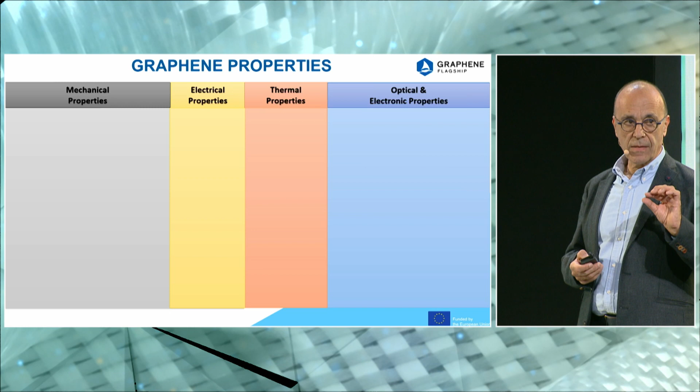Some of you may not be aware of what graphene is. Graphene is a monoatomic material which has a very small thickness, just the size of an atom. It has amazing properties: very high mechanical properties, 1 terapascal, the highest stiffness, strength of around 100 GPa. It can also be stretched up to 20-25%. Very high electrical properties, better than copper, and excellent thermal properties.

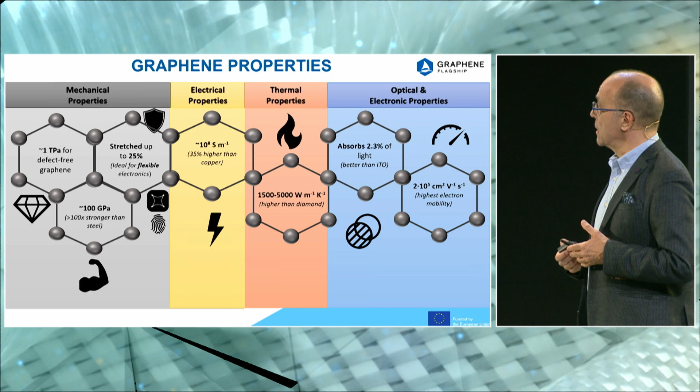So it's like the holy grail of materials. In terms of optical properties, it's almost transparent. It absorbs only 2.3% of light and has very high electron mobility.

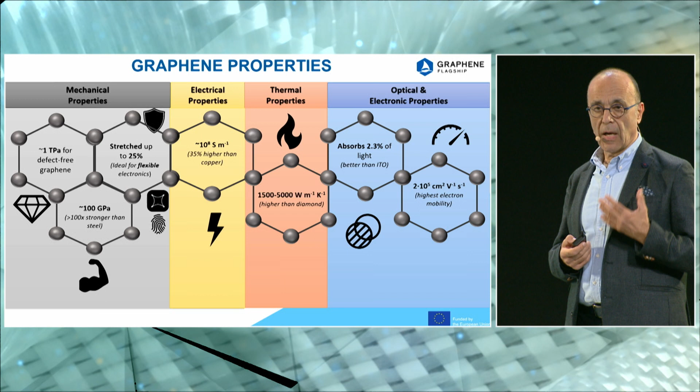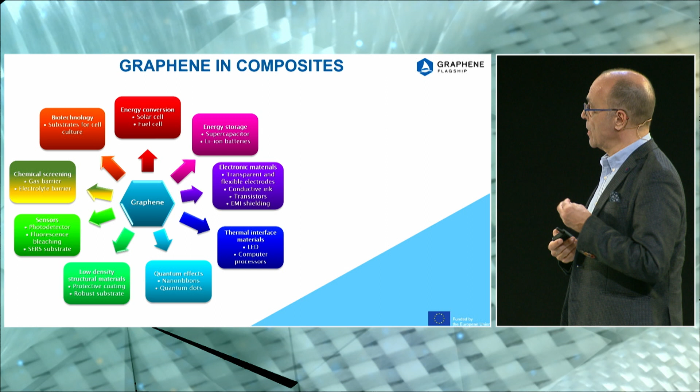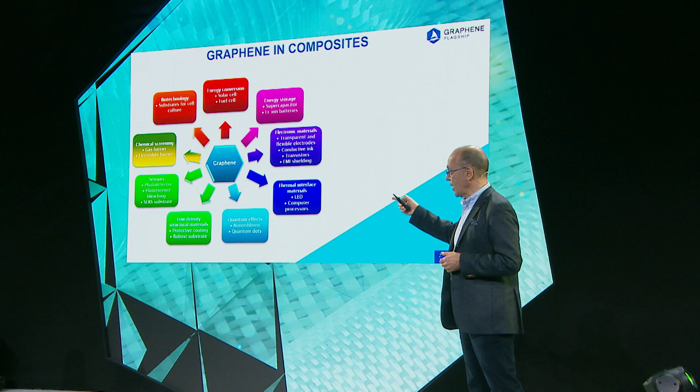Graphene in composites, really, you have to think of all kinds of applications. Down on the left is application on structural materials because of the mechanical properties. But going clockwise from the top, you have applications in energy, composites used in energy applications, composites used as electronic materials, thermal interface materials, quantum effects, nanoribbons. And skipping structure, we can go to sensors, gas barrier, and even biotechnology.

So there are a lot of applications for this raw material, which is graphene, into composites. Then composites, which transport graphene, can be used in so many other applications.

In terms of patents, the blue gives you the patent graph for graphene itself, and below is graphene composites, which has now leveled off, but still we're talking about a peak of 2,000 patents a year, and this, of course, refers to graphene composites.

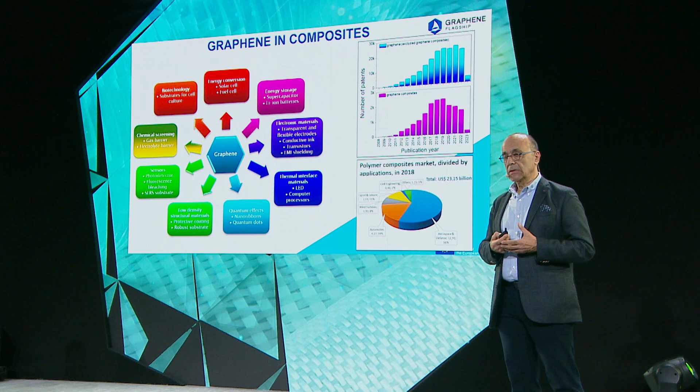Just prior to the pandemic, the most important application areas were aerospace and defense, but also automotive is quite prominent there, wind turbines, etc. Even in civil engineering, it goes into concrete.

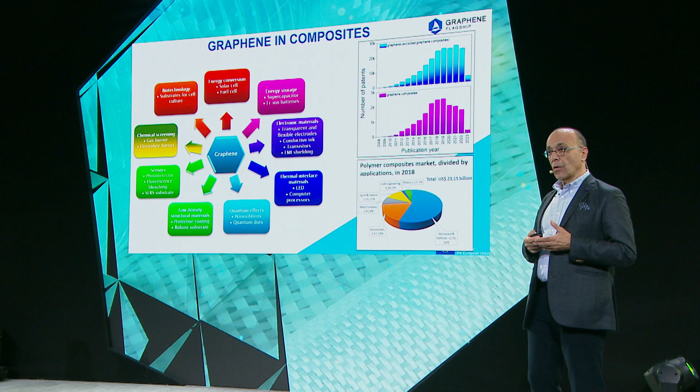Today, we talk about graphene polymer composites in particular. Novel manufacturing processes have been developed. It's a lightweight structure, lightweight materials we're talking about. And multifunctionality is the key word for this material because it combines so many different properties: mechanical, electrical, thermal.

Graphene Flagship is one of the largest networks of funded research in Europe, 170 establishments, and had a duration of 10 years. It's coming to an end this year, with a budget of 1 billion euro.

A lot of things have been developed over the last 10 years. I will just show you some examples. Master batches: you can put graphene into master batches, and you can transport it. Because it's a nanomaterial, you have to transport it in a very safe way. So master batches have been developed, particularly from companies like Avanzare or BeDimensional. The first one is Spanish, the second Italian. These companies actually started at the beginning of the Flagship, but now they are developing into medium-sized SMEs.

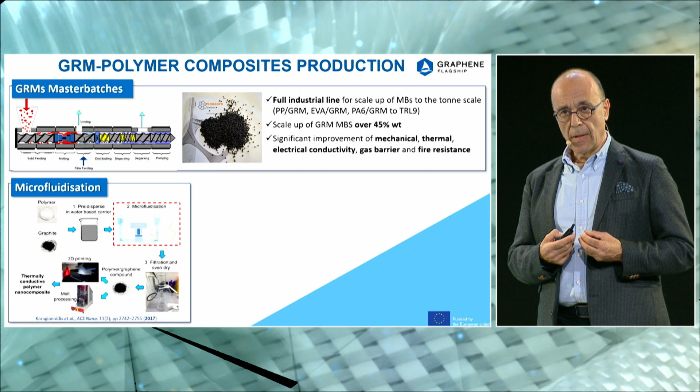Microfluidization is another way of processing graphene in a safe manner. This is a slide from University of Cambridge. Filament 3D printing: you can actually add graphene into a polymer. This is what we're doing in Greece, University of Patras and Forth in Patras, where I come from. You can build all kinds of heating devices using the 3D printed fibers, because the graphene bestows thermal properties and heat to the material.

So other innovative applications, which I particularly chose as a very important application, is fire retardancy. This is again the same company, Avanzare, that has done this work. You will see on the right, graphene added to a material actually lowers the intensity of fire, delays ignition, and helps to form a protective char. It is by far the best fire-resistant material to be used in polymers.

Much better than any other and less toxic than any other additive that stops fire. You can see an example there where you try to burn a graphene composite knob handle - you will see you can never burn it. On the right, you will see carbon fiber material showing the heat release rate prior to adding graphene, and then after adding graphene.

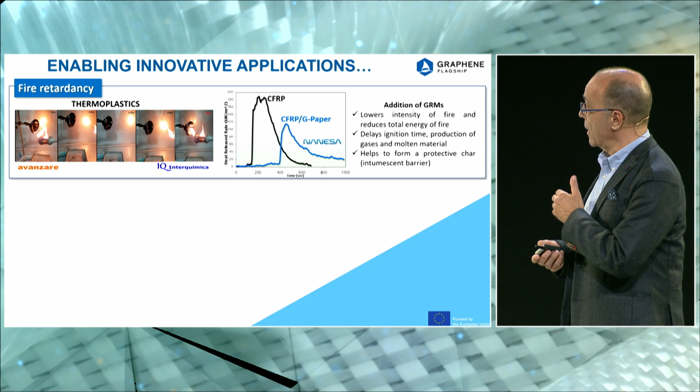This is on G paper. G paper is a graphene paper produced by another company that's been developed, Nanesa, which is an Italian company that produces graphene paper that can go into various applications - you will see another application of graphene paper in a minute. By adding that paper, the heat release rate goes right down.

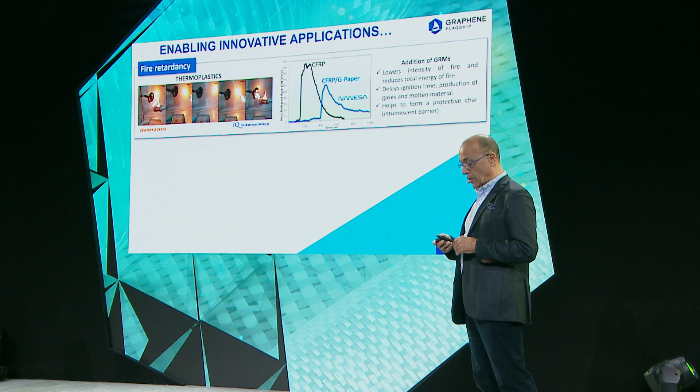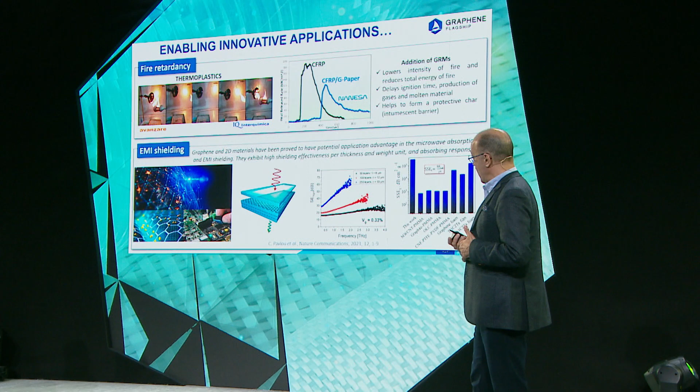EMI shielding is another area. It's very thin and absorbs radiation. So if you divide the thickness, which is very important, and the size of the material, you will see on the right that the effective EMI shielding is much better than any other competing structure, even MXenes or CNTs, etc. This work has been done by us, from our own university, in collaboration with CNR in Italy.

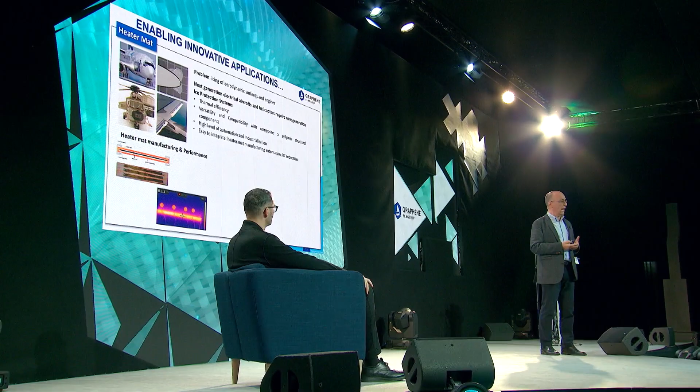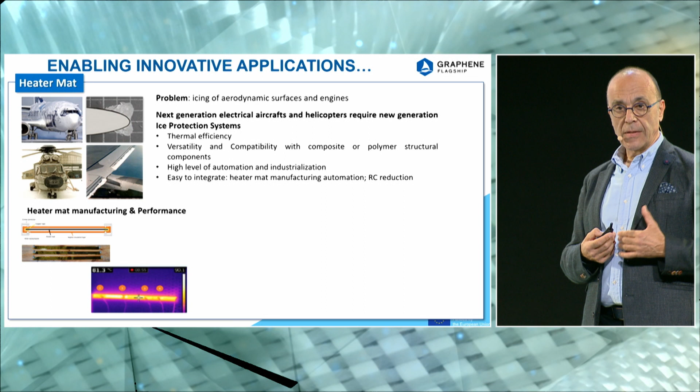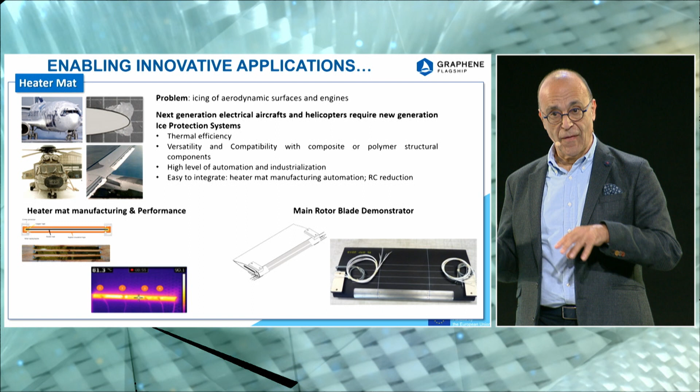Very important application, which Airbus Helicopters is leading within the flagship. We have projects within the project, in other words, the heater mat. This is a composite structure that is added to other composite structures, and by just turning a switch, it heats up that section and melts the ice on a helicopter blade or airplane. You'll see the structure on the left and how it's heating up. Joule heating is very good, graphene is very good at that because of the free electrons it has in the structure. The current is really I squared in Joule heating, so it's a very effective Joule heater. This is what we're developing - I'm sorry, I cannot say more than that, but it's a rotor blade demonstrator that can go on an aircraft.

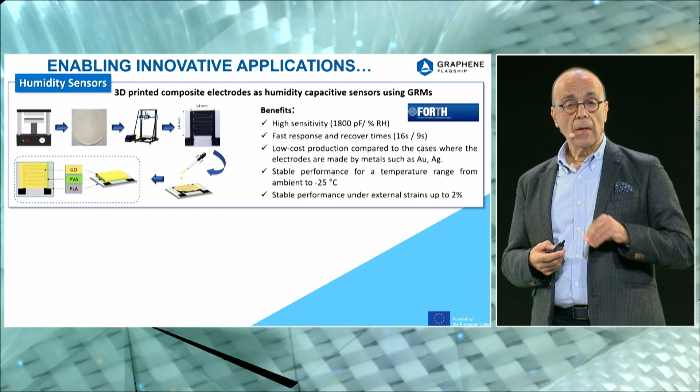Other applications include humidity sensors - you can add graphene, which is very sensitive to the presence of water, and 3D print a sensor with very high sensitivity and fast response. Pressure sensors are again composite structures in the form of tapes. You can wrap them around your neck or hand and monitor blood pressure and other things. It's very lightweight and very interesting. The humidity sensor is used on the heater mat applications that go on an aircraft.

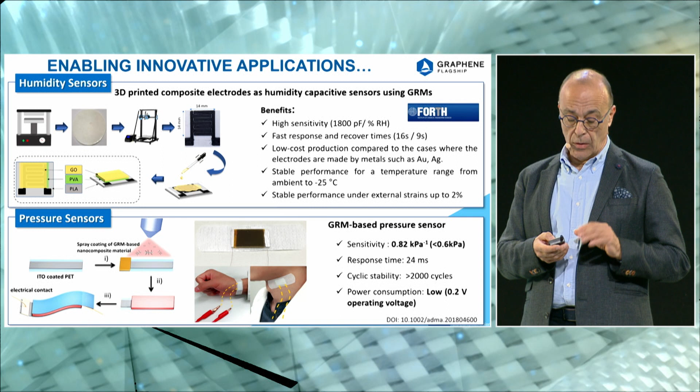Another completely unrelated area is using graphene as a coating. We have ourselves put it on artwork because it stops UV radiation from destroying the artwork. Because we're in Paris, artwork is important, and it also does not allow humidity to penetrate the artwork. You can develop composite coatings like that on metals and other materials, because nothing permeates graphene, not even helium. So it stops water and even toxic substances.

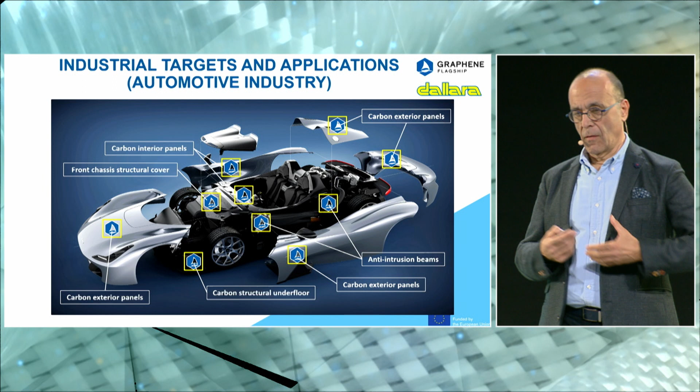That's the last slide - this is a 100% exterior carbon fiber car, the Dallara automotive car, which is on sale. Dallara also manufactures structures for Formula One cars of other companies like Ferrari and Lamborghini. We add graphene into structural parts, which can be the underfloor of the car, the exterior panels, and the internal panels. That gives damping resistance, anti-rattling resistance, and of course fire resistance, which is very important for sports cars, so it doesn't catch fire straight away.

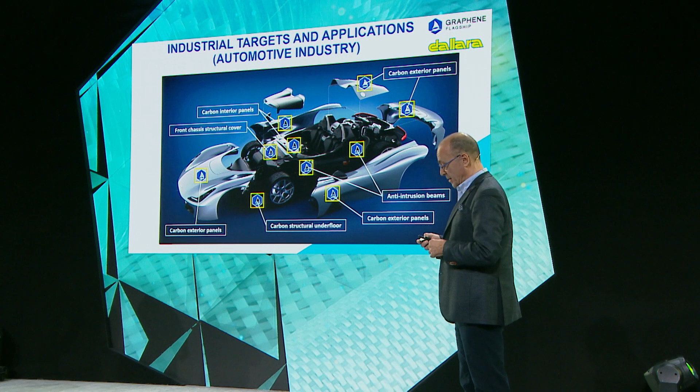Thank you very much. As Kostas said before, inside the Graphene Flagship, which is a European project, we have projects inside the project. Now I am presenting one of the projects inside the project, which is led by the industrial company CRF. Just a small introduction about CRF - it stands for Centro Ricerche Fiat. Historically, we are the Fiat Research Center, but now we are almost integrated into the new Stellantis organization. In the product development phase, we are responsible for innovation in materials, processes, and methodologies inside the company. I'm a materials engineer, so I'm responsible for new materials inside the company. We represent Stellantis in European and national collaborative projects, joining pre-development, and we promote networking action. That's why we are in the Graphene Flagship from day one, in order to bring the innovation of the Graphene Flagship inside our vehicles.

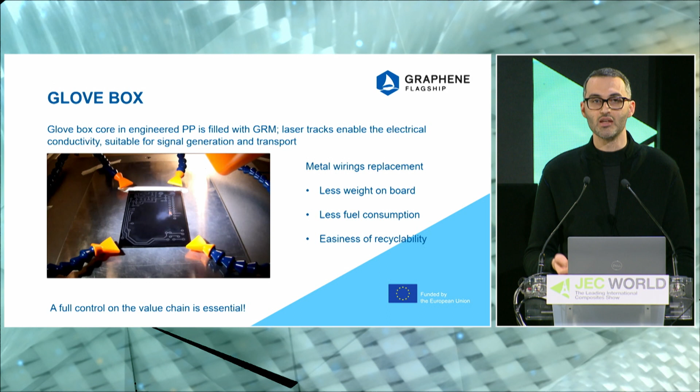And in fact, you have a metal wiring replacement, so you have less weight on board, less fuel consumption, and easiness of recyclability because everything is plastic. Of course, full control on the value chain is essential, and in the next video I will show you which were the industrial steps that led to our demonstrator that we have here presenting.

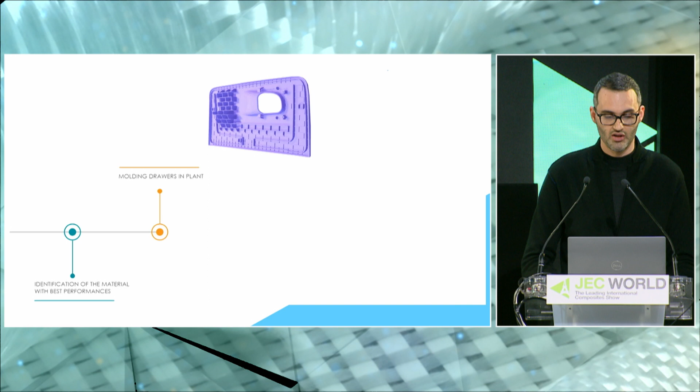There was a lot of industrial phases, starting with the identification of the material with the best performances, so you have to choose the right graphene for the right application. There was a manufacturing phase in which we molded hundreds of drawers in our plant with the material doped with graphene.

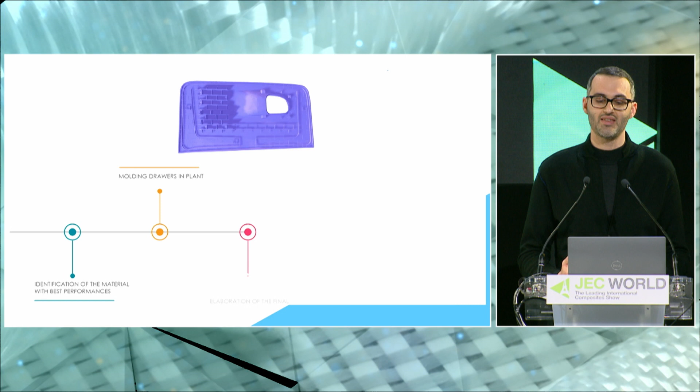With these drawers as industrial parts, we had to elaborate the way to produce the electronic circuit, how to put it. You see here there are different areas: a bigger area that works as a sensor, so as a button, and a small area that is useful to transmit the signal to the rest of the drawer.

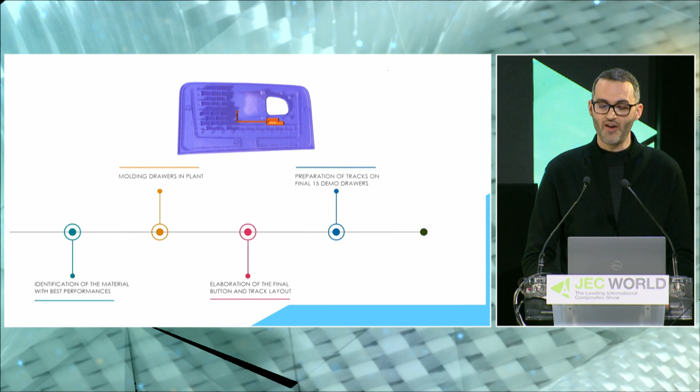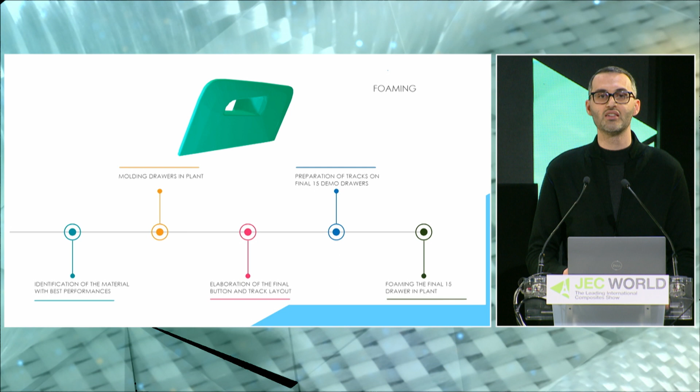And then we tested this. We updated our manufacturing phase in order to have the best solution, and now we are preparing 15 final demo drawers with the overall best solution defined. And then we are moving to the old manufacturing phases that are performed typically on traditional materials, so we are foaming it in order to have an aesthetical surface, and this foaming is performed only on the aesthetical part.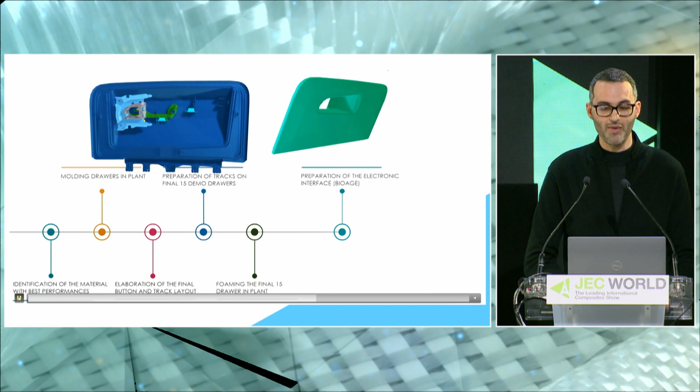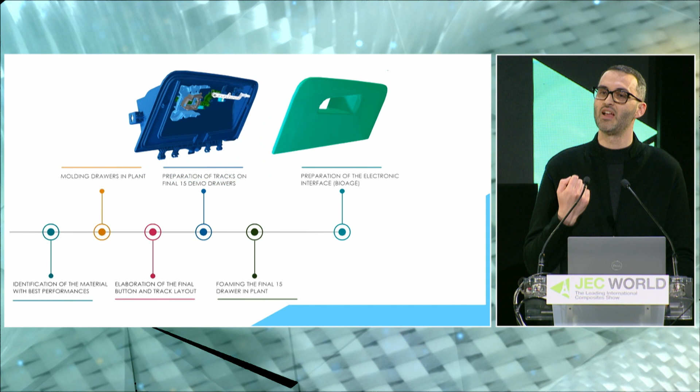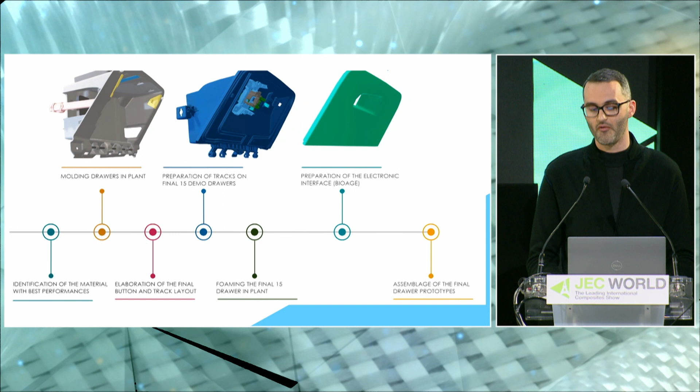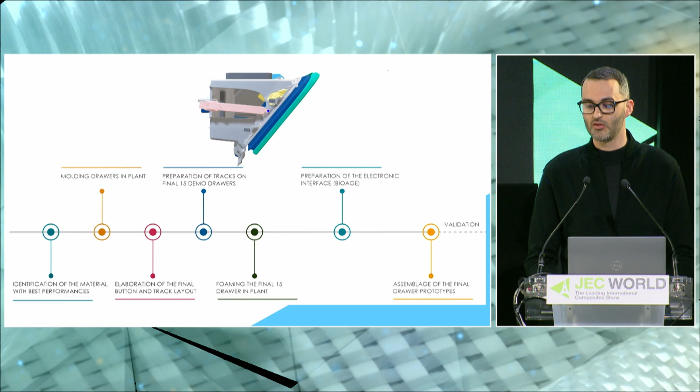In the meantime, you also have to think about the electronics, so the rear part of the drawer has electronics that you need to fit inside it. There is an electronic circuit inside the component that enables the switch on, switch off that tells the CPU to open or close the drawer. Then there is the validation—first the completion of the manufacturing phase, the assembly of the overall component, and the validation phase in which you compare the component to the traditional one to be sure the properties are exactly the same.

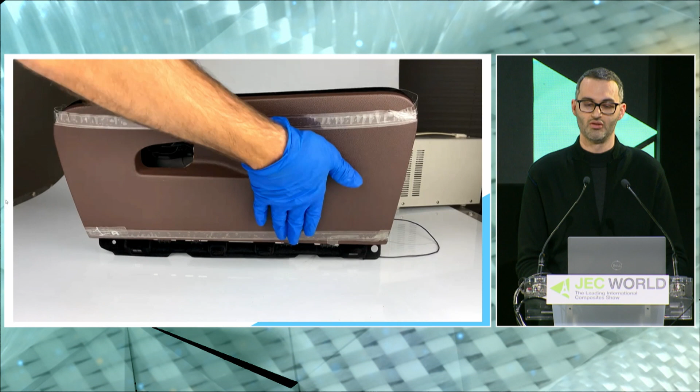You can see here a video of the first demonstrator. You see there are still some holes; this is not the final one. But you will see in the video that if you touch the drawer in the right area, it opens, while if you touch it everywhere else, there is no signal transmission, so the plastic is completely isolating in those other areas. So you can have a selective opening only in the area that you want.

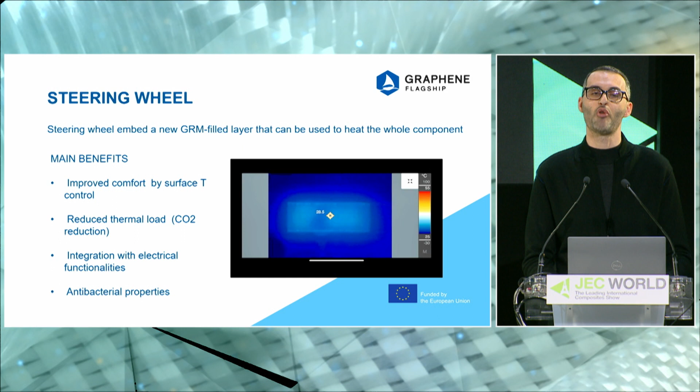For the steering wheel, the application is different. Here we are not using graphene for its electrical properties, but for its thermal properties. You embed a GRM doped layer into a synthetic leather skin, doping an additional layer on your commercial product. If you heat it by Joule effect, as Costa said before, you get a spread of heat very fast and very homogeneous. So you have a surface that is very hot in less time, a reduced thermal load, and electrical properties introduced inside your component. So you have a multifunctional steering wheel.

I can show you also in this case a video that represents all the manufacturing steps we did in order to reach something that is very useful for the industry and quite ready for industrialization.

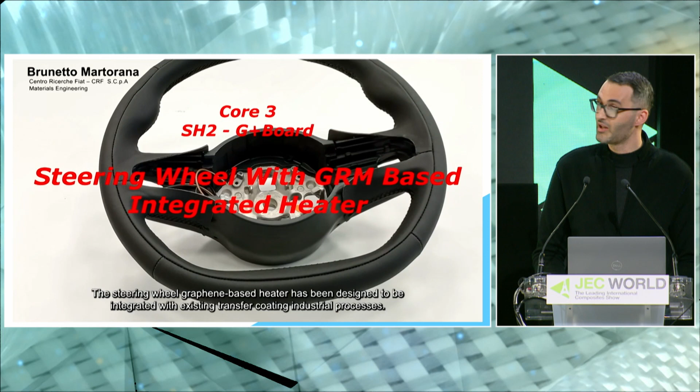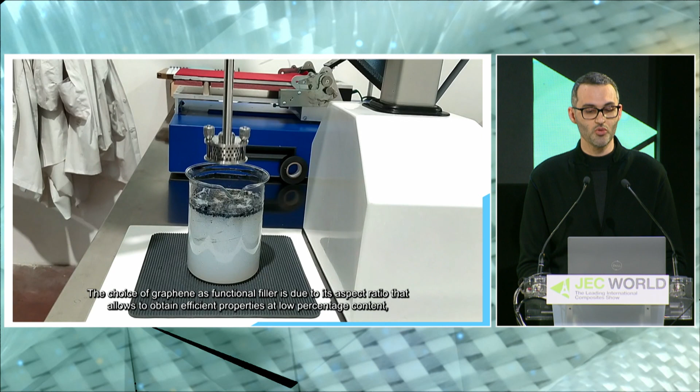You will see some subtitles. This is one of the demonstrators that we have here at the fair. This is the steering wheel. We introduced graphene, as you will see in the video, inside a PU in the precursors. You mix it, the graphene is the black powder. Then, with the same manufacturing technology used for synthetic leather, you have a roll made of the classical layers plus a layer of graphene inside. This roll can be adapted to each steering wheel depending on the dimension and the 3D shape.

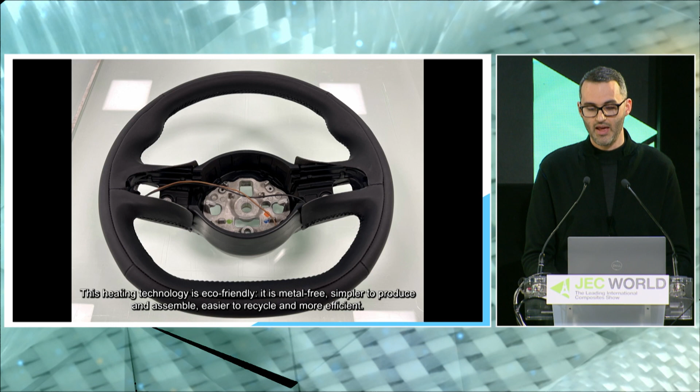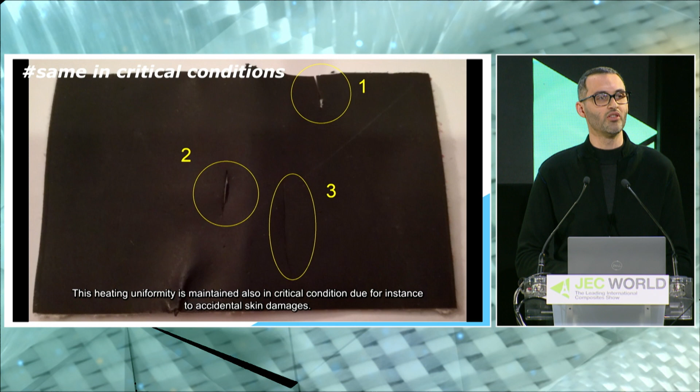It can be wrapped exactly like a traditional steering wheel because it has the same flexibility. So it is metal-free, and as shown before, if you attach current to the electrodes, you have a spread of heat which is very uniform for all the samples. This is only a sample, and there's also a plus: if you cut somewhere in the leather, in that area you won't have any electrical or thermal conductivity, but overall the system is still working.

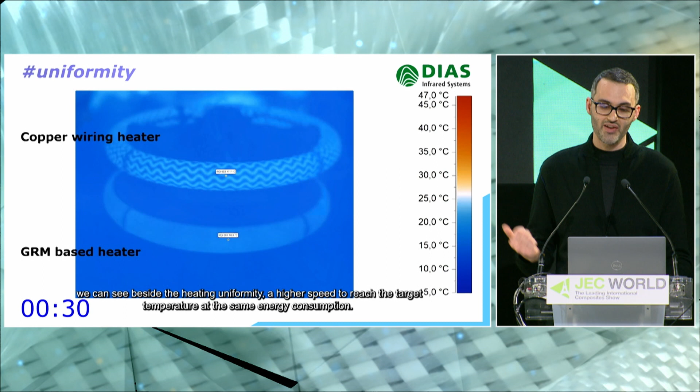You see here there are some notches made purposely, for comparison between the traditional one, which has wire copper inside the skins, and the new graphene one. On the upper part is the traditional one, on the lower part the new graphene one. You see that the traditional one spreads heat from the copper wires to the rest of the component, while the new graphene steering wheel has better distribution in less time and with higher performance in terms of energy absorption. So you have a heated steering wheel in less time and with less energy consumption.

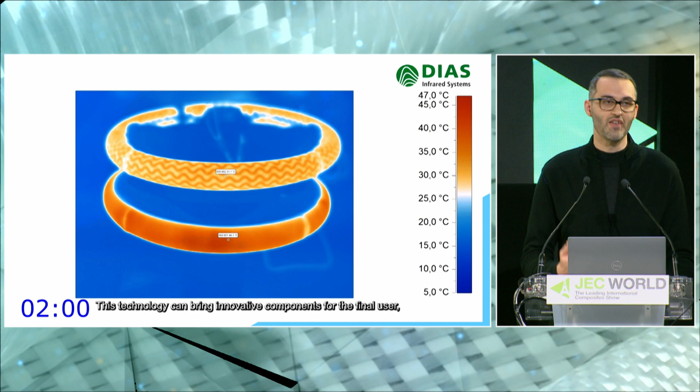In conclusion, owing to its extraordinary properties, graphene has attracted different players across industries at different levels, as Costa said before - aeronautics, automotive, and other fields. We can make lightweight composite components that are also multifunctional, and we are now ready to have large quantities of graphene - we're talking about ton scale, so we are now well into the industrial phase. There are very different applications: electronics, healthcare, and more. Specifically in automotive, we tested and are very close to industrializing two different implementations of graphene for two different kinds of multifunctional components. We are only using the thermal and electrical properties so far, but more is yet to come because there is a lot more that can be done.